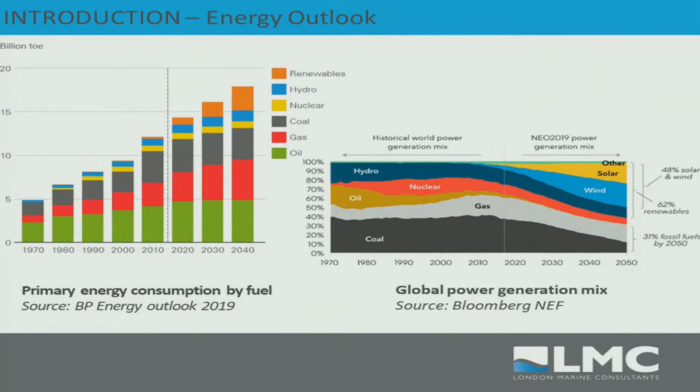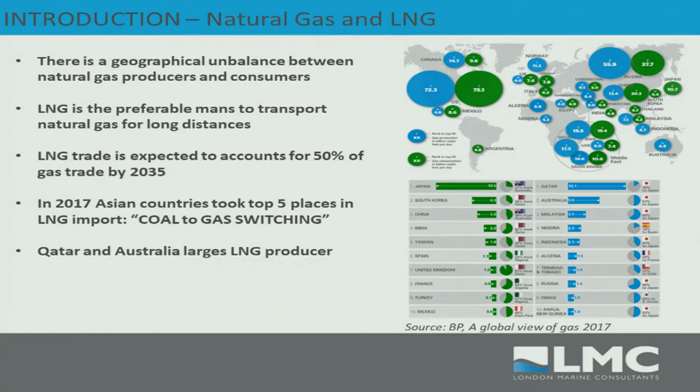Pipeline options for places from Australia to South America or to the Far East are not feasible. As an introduction to the energy supply chain, again this has been discussed already, but first of all we need to understand where an FSRU enters the gas supply chain on the marine sector. This is a simple schematic that shows the three main components that compose the supply chain.

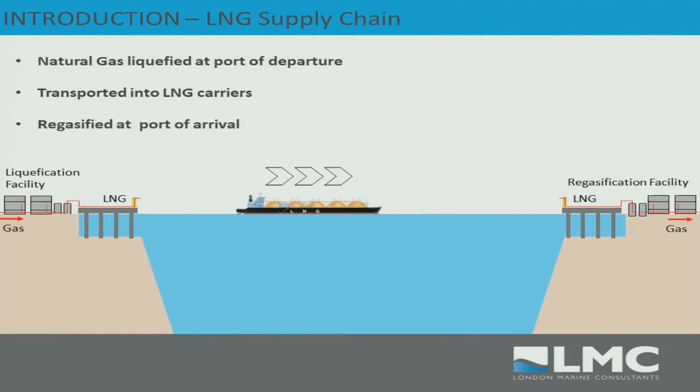We have a liquefaction facility at the port of departure, in which natural gas is transformed to a liquid state, transported in a cryogenic state via LNG carriers, and then delivered to a port of arrival where a regasification facility unloads the energy and converts it to a gaseous state and sends it to the market and to the consumers. As we probably all know, FSRUs enter the supply chain as the port of arrival and regasification facility.

LNG carriers berth on the side of the FSRU, typically unload LNG stored in the vessel tank, and it is regasified and delivered. There are several advantages to FSRUs compared to, let's say, shore-based terminals, and these were already presented by the previous speaker. They can represent a reduced upfront cost, for example, due also to the fact the contracting strategy is quite different.

FSRUs tend to operate on a lease-and-operate basis, so the terminal doesn't own the vessel, but leases it for a fixed term of years, reducing the upfront cost. Schedule, again, for a project startup is short - we're talking about 1 year against 4 years - and the overall footprint is smaller.

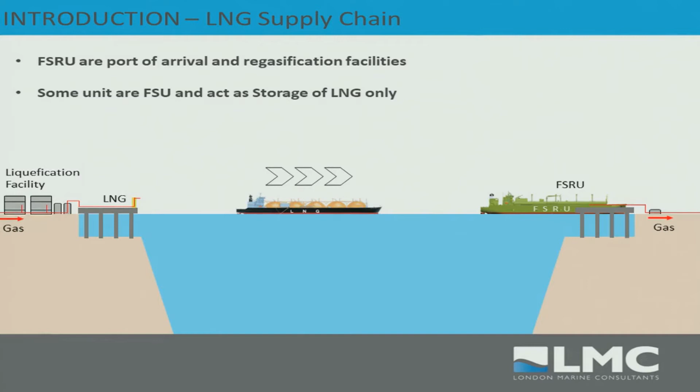All the storage and regasification facilities are on board the vessel, minimizing the amount of infrastructure needed onshore. So an FSRU can be a long-term solution for regasification, or a short-term one to cover, for example, a peak in demand, or to provide a solution while bigger onshore structures are built.

A little bit of introduction on what an FSRU actually is: based on LNG carrier design, with the addition of regasification and metering modules, for example. Owners love the flexibility to use an FSRU as an LNG trading carrier in between contracts to make the economics of the vessel work, and using a fully seaworthy design is the best option.

In certain specific cases, when the actual volume of storage required is small, the utilization of an LNG carrier design is not economically beneficial, because there is no need to use it as a trading tanker. And then we see that some FSRUs in the small case are based on non-self-propelled barge designs.

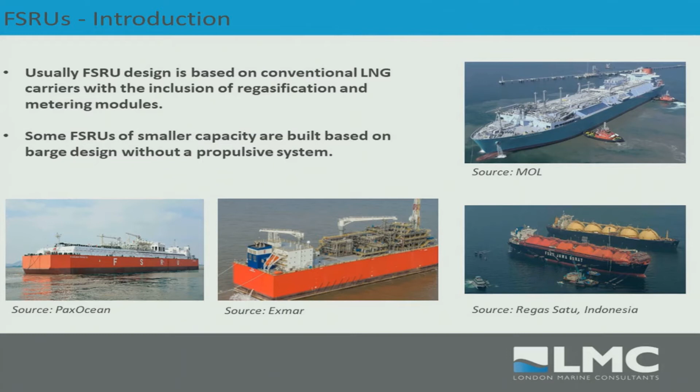The majority of the vessels are seaworthy LNG carrier design. We assessed that more or less they are all similar. So what's the main difference for an FSRU project is the position where the vessel is actually located, or moored.

In order to be economically viable, the vessel needs to be as close as possible to the entry point in the gas network, or as close as possible to the end consumers. That's why we see that the majority of the FSRUs are actually more on the jetty side, inside a sheltered harbor, or on sea islands near to the shore.

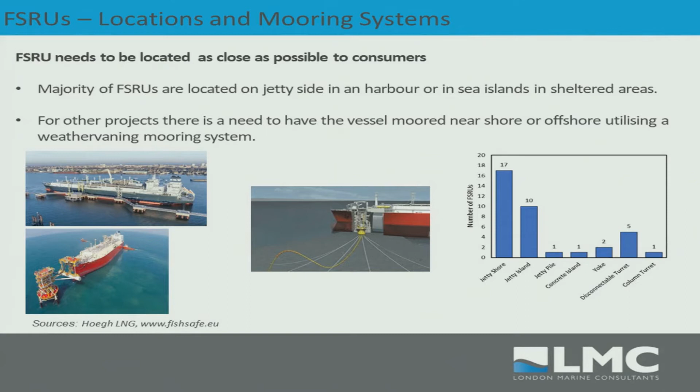But there are still some cases in which it's not possible to moor an FSRU in a port, for example, in developing countries, or in places in remote locations where infrastructure is not available. Therefore, other mooring options need to be considered that can basically lead an FSRU project to be technically viable. We see vessels moored on sea islands, few meters from the shore, or few miles from the shore, and we see FSRUs that are more 20 or something miles offshore, in what we call a harsh offshore environment.

And what kind of mooring options are available to an FSRU designer in order to locate an FSRU where it is needed? As we said before, the majority of the vessels are jetty moored with a mooring system that is typical of the marine industry, something that you are probably more familiar with.

Then we're moving further away from the shore. We have sea islands, similar concept. Then when we move further offshore, we start seeing mooring systems that are more typical of oil and gas applications. We have complex turret mooring, and we also start to see the utilization of spread mooring systems.

So by looking at this picture, from a mooring design point of view, I see the two ends of the spectrum. From one side, we have a very simple marine jetty side mooring, and on the other end, we have complex turret weathervaning mooring systems.

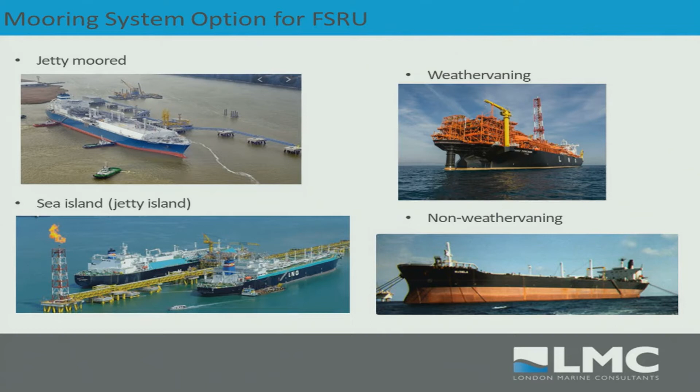And all of them have been applied successfully to FSRUs. So the designer needs to know what are the actual options available, needs to know the limitations of each, and this is what I'm trying to do in this presentation. I'm trying to introduce the different systems in general terms, describe the main characteristics, and provide some advantages and disadvantages that are usually considered at a concept selection phase, when it's quite important to rule out unfeasible options and include all the technically and commercially available options.

So starting from jetty mooring, this is probably the easiest and the most common form of mooring system. If you visit a port, we see tens, hundreds of ships moored to a quayside. The mooring system runs from the mooring winches or fairleads to mooring bitts and bollards and quick release hooks on the pier. And the design of a mooring system for an FSRU in terms of layout is not much different from that of any ship.

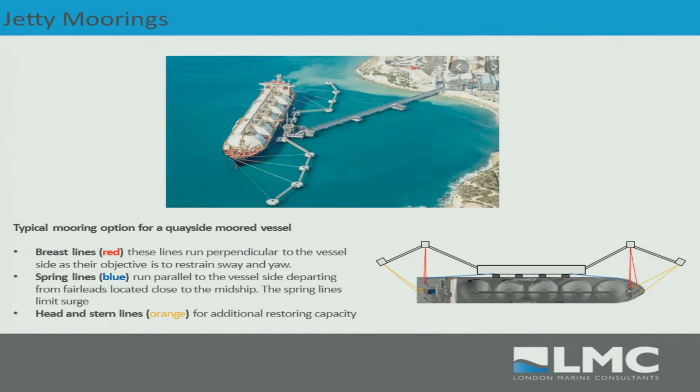Ship mooring lines are grouped with regard to the function they need to satisfy, depending on if they have to resist longitudinal loads or transverse loads, and depending on what position or part of the vessel they are located. I won't go much into detail, but the important thing is that the analogy, in a certain sense, stops here. So although the two systems look exactly the same and the layout can be designed with the same kind of guidance, the way the systems are actually designed is quite different.

For a trading tanker visiting a port, mooring is usually seen as a temporary activity with a short duration, and the mooring system is designed based on a simple quasi-static or static load balance check. For an FSRU, jetty side mooring is seen as a long-term operation, in the same manner as for an FPSO. Therefore, the type of analysis and the load cases that need to be verified are more detailed. We need to start looking into dynamic mooring analysis, combining wave frequency and low frequency motion.

And we introduce a new set of challenges that are not common in the oil and gas industry. For example, the effect of shallow water on wave mechanics and complex bathymetry, ship-to-ship interaction during offloading operations, and even ship-to-shore interaction in some cases, or loads from passing vessels. And all these designs need to satisfy a specific set of class rules that is quite inspired by the offshore oil and gas industry, so it's a quite severe set of rules.

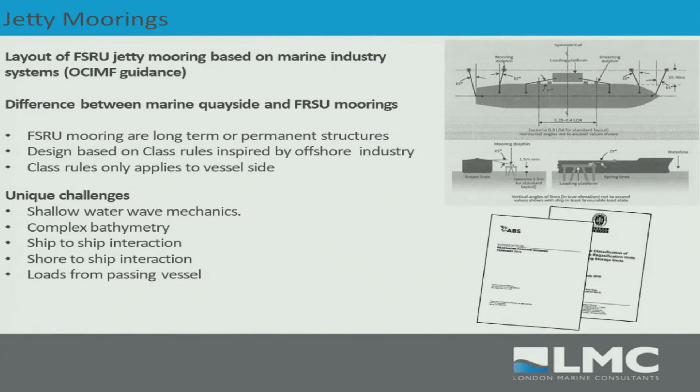And so the takeaway point is, yes, they are indeed something that we are familiar with, but the type of specification, the type of capacity of the system, and the type of design life, as well as fatigue considerations, play a role and are quite different from what we are commonly used to.

Just to give a little bit of idea on advantages and disadvantages of jetty side mooring: jetty side is an established and well-known technology, and there is a long list of contractors that can actually provide the work, and more importantly, there is a big pool of local contractors as well.

So in some countries, when there is a need for local content requirement, a structure of this type is usually a good thing. They provide easy access to the vessel, and the marine facilities are less exposed to the environment, providing benefit for maintenance and operation and wear.

The main disadvantages are that building a jetty, if it's not available, is a substantial work that can take years.

If the vessel is very close to the shore, it's possible that there is need for dredging activity, either at startup or also maintenance dredging during operation.

And these, for example, we have seen in some cases where dredging was a stopper for the project, for selection of specific location, as it can create a shipping hazard because it can obstruct the traffic routes.

And they are also close to local shore communities, and they can provide an issue for the approval process of the project. And in some countries there is also a security risk, a security concern, with the structure being accessible from the shore.

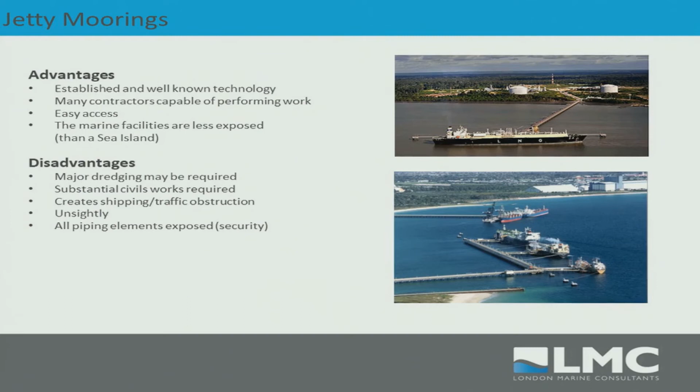So moving one step further offshore, we have another type of system we call sea islands. The concept of mooring is exactly the same.

The vessel is moored on the side of the pier, but in this case there is no physical connection to the shore anymore. It's a quite broad definition because it includes systems that are few meters from land, as well as systems that can actually be a few miles offshore in the middle of bays.

But the way we decided to split between jetty connected to shore and not connected to shore is that for this type of project there is generally the need to lay a pipeline on the seabed, which changes the contracting strategy and also changes sometimes the balance of overall cost for the project.

Technical considerations of the design of this system are quite similar to the previously seen shore-connected jetty mooring, but now the vessel is more exposed to the open environment.

There is probably the need to plan for disconnection, or a procedure for emergency disconnection. And the terminal availability is also reduced, especially for offloading operation.

This still tends to occur side by side. But in some cases, when, for example, we are talking about what we call a cross-jetty layout, the LNG carrier is actually moored on the other side of the jetty, with LNG transfer through the sea island. And they can be used to enhance, for example, availability.

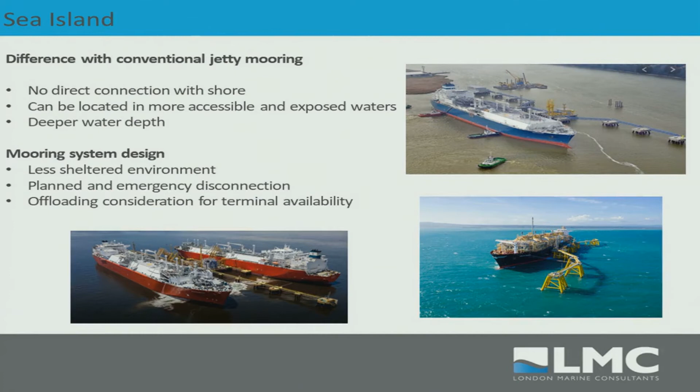What are the advantages and disadvantages compared to the previously described mooring system? By moving the terminal further away from the shore, we can access deeper water, removing the requirement for dredging. Again, it's an established technology, the same type of structure as a shore-connected jetty.

They provide additional safety and security, since access to the pipe is not feasible, and the structure is not accessible from the shore.

Moving away produces less visual impact compared to a shore-connected jetty, and moving aside from port gives a lesser impact on marine traffic. The main disadvantages are the ones we basically discussed a few minutes ago.

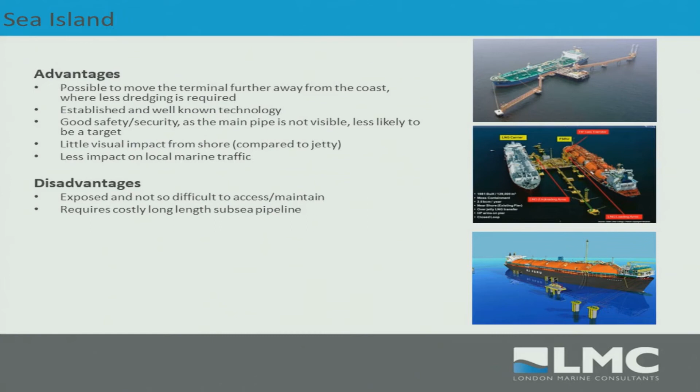The exposure to the environment does not produce the same amount of availability and reduces the number of locations in which this system can be used. And in some cases, the cost of laying a pipeline is a big part of the overall cost of the project.

So moving further out, we enter the domain of oil and gas mooring solutions. If we need to locate our FSRU in more exposed open water, we need to design our mooring system in the same manner as it is designed for an FPSO unit. The system of choice for FSRUs is typically a weather-vaning mooring system.

For those not familiar with it, in a weather-vaning mooring system, the vessel is allowed to rotate around a single point called the turret, which is, for example, this structure here, in which all the mooring lines and mooring risers terminate. By doing so, the vessel aligns itself with the prevailing environment, reducing environmental loads and vessel motions, and permits units to operate in harsher environments. For example, in the North Sea - which isn't actually the case here, but we'll use it as an example.

For an FSRU project, we have seen three types of weather-vaning mooring systems applied: permanent turret system, disconnectable turret system, and yoke system. I'll try to go quickly through all of them, describing the main characteristics and pros and cons.

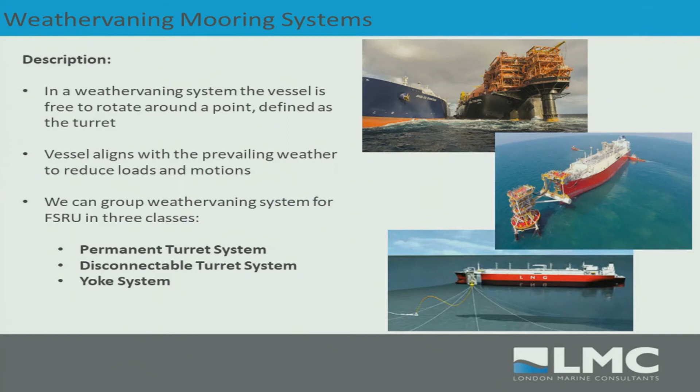We start with a permanent turret. In a permanent turret, the vessel is permanently moored, so there is no disconnection capability. Permanent turrets can be defined with respect to the location of the turret along the vessel. The most common type is the external cantilever, where the turret is located at the bow of the vessel, above the free surface. Other types can be a column turret, where the turret is at the keel level, always at the bow, outside the hull, or an internal turret, where the turret is located in a moon pool inside the vessel hull.

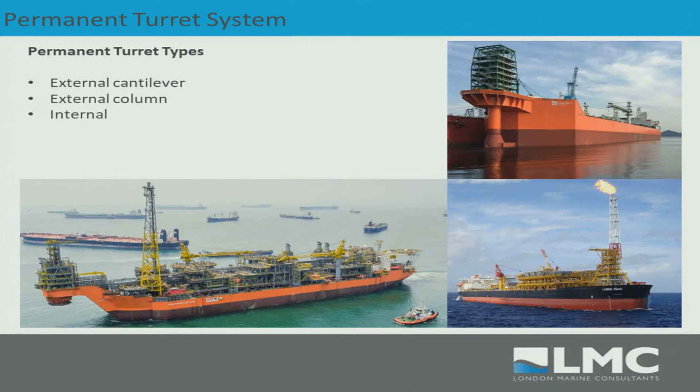Regardless of the type of turret, they all share the same components. Starting from the bottom, let me introduce this picture. This is a snapshot of a 3D model of the turret for the Toscana FSRU, which is permanently moored offshore Livorno in about 120 meters of water.

Let's start from the bottom. We have what we call the chain table, where the mooring lines terminate and risers enter the hull through bend stiffeners. Going all the way up, we reach the main deck height of the vessel, where we have a platform that we call the turret head.

At the turret head, we usually have the bearing, the slewing bearing. This is the mechanical piece of equipment that allows the structure of the turret to remain stationary while the vessel rotates around it. There are different configurations of bearings - they can all be located on the main deck, or, like in this turret, there can also be a smaller sliding bearing at the keel level. Some use bogie wheels, so there are a lot of options.

Above the turret head, we have all the geostationary pipework, so all the piping connected to the chain table terminates into a swivel. The swivel is a mechanical equipment that allows fluid transfer between a fixed pipe and a rotating one. So while the bearing provides a mechanical coupling, the swivel provides the fluid coupling between the vessel and the seabed. In this case, on the FSRU, gas is pumped through the swivel, reaches inside the piping of the turret, enters the column, and is then sent out through the flexible risers.

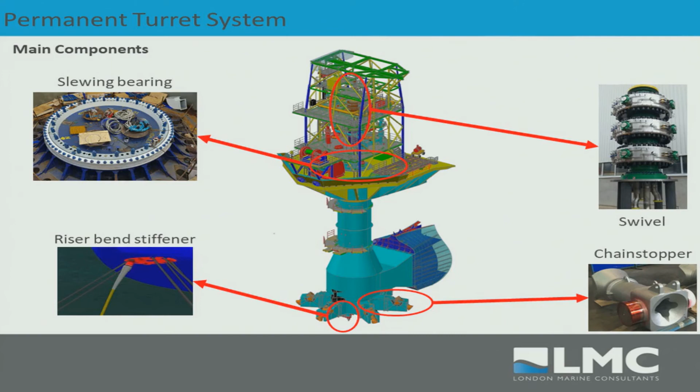What are the design considerations for turret mooring for FSRUs? We have seen in the previous slide different types of turret, but we can say that column turrets are best suited for use in an FSRU project.

This is due to the shape of the FSRU. FSRUs are indeed based on LNG carrier designs, and there isn't much steel at the main deck level to allow for load transfer. Therefore, a structure like a column turret, which integrates both a main deck and keel level connection, allows for easier integration with less modification work on the vessel compared to other systems. But although it requires less modification work, installing a turret on a vessel is still a major modification that in some cases prevents the vessel from being used as an LNG carrier anymore, because once the vessel is permanently moored, it's classed as an offshore installation, and the mooring system is...

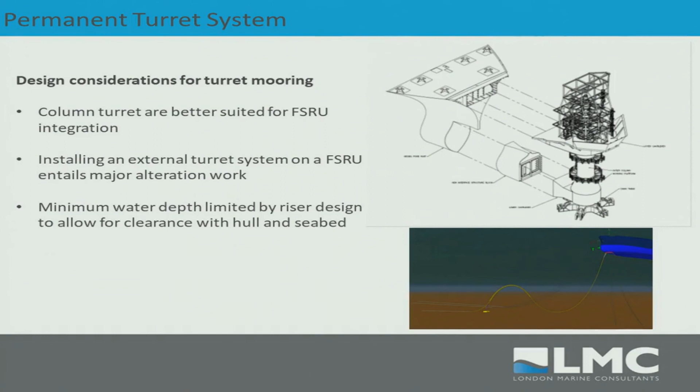So if you want to quickly go through the advantages, it's a well-known technology and it allows the FSRU to operate in harsher, more open environments.

In case the vessel is equipped with thruster, they also allow for weather vaning to ease offloading operation by sheltering the incoming LNG tanker. The main disadvantages are cost-related.

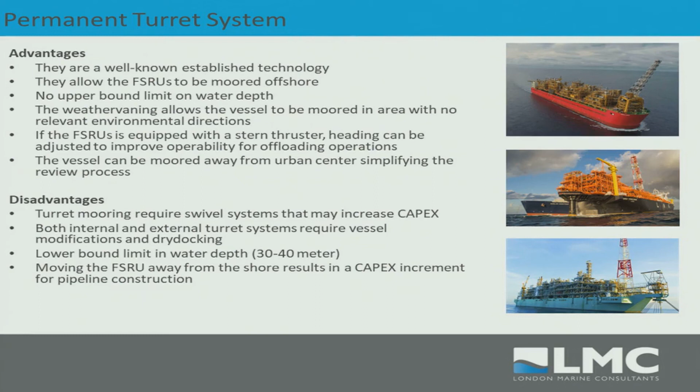Turrets require quite elevated capex for some mechanical infrastructure. You require drydock for installation, and something we didn't discuss for time, there is also a lower bound application limit due to the clearance between the riser and the vessel keel when the ship weather vanes on top of the riser.

Another type of turret is a disconnectable turret buoy, like the one that the previous presenter discussed. In this case, mooring line and riser terminate into a mooring buoy that is pulled into a moon pool inside the FSRU hull. There are different types of mooring buoys, but the type on the left is the only one utilized in FSRUs.

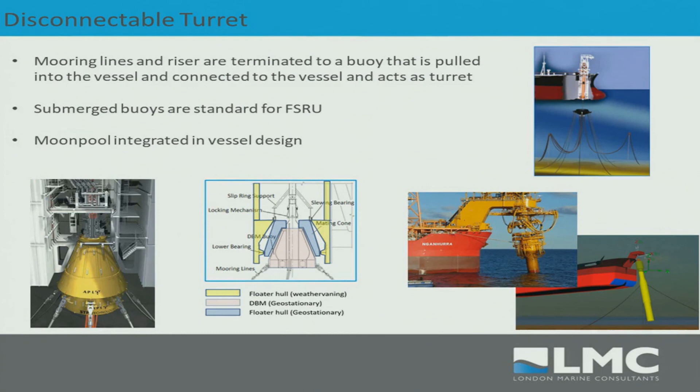The main advantages are that in this case, it's possible to moor the vessel in quite harsh environment with small infrastructure, because in case of storm, the vessel can disconnect and sail away. It can be applied to shallow water depth because the weather requirements are smaller, and one vessel can connect to several buoys, simplifying the switching from one project to the other.

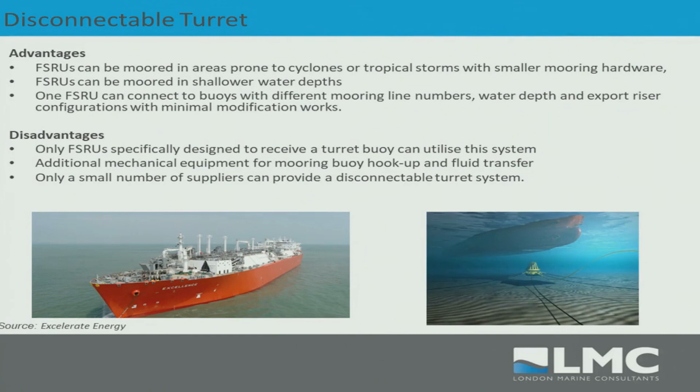Disadvantages: there are only a limited number of suppliers that can provide the system, and there are a limited number of FSRUs that can actually receive it.

The last type of weather vane mooring system is a yoke. There are currently 2 FSRUs mooring using a yoke. In the case of a yoke, the tower is connected to the seabed either via jacket or a seabed template, and the vessel is connected to the tower using a counterweight structure called the yoke.

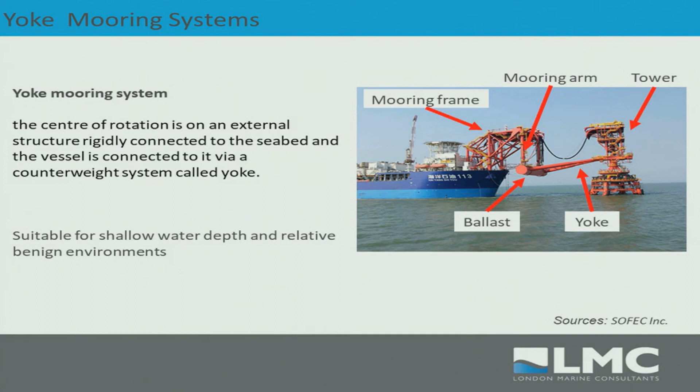The fact that the restoring force is provided by a well-defined component allows the system to be installed in shallow water depth, something like 20 meters. It is not available on common moored vessels, and it can be utilized in quite benign environment. I think the limit is around 5.5 to 6 meters HS.

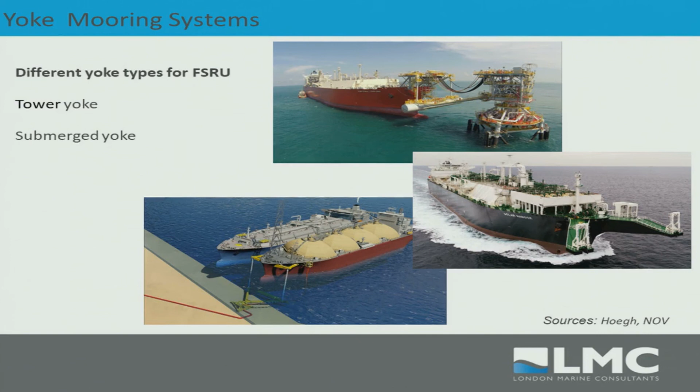There are different systems depending if the turret is above the seabed, above the free surface, or on the seabed. In the case we have tower yoke or we have submerged yoke. Main advantages, as I said before, you can access shallower water, reduce pipeline lengths. Modifications of the vessel are reduced to the main deck level.

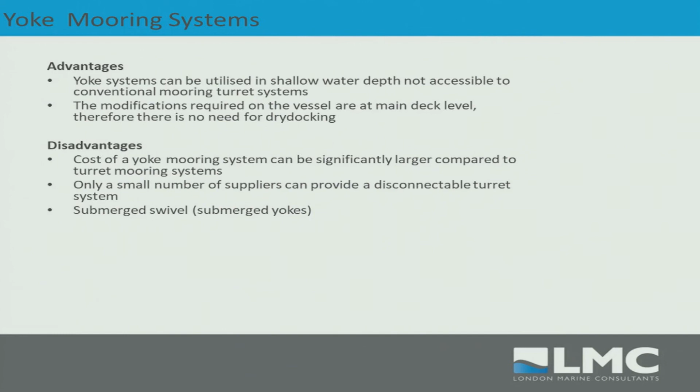Main disadvantages: the yoke is an expensive piece of equipment, only a limited number of suppliers can provide it, and a submerged swivel for submerged yoke is a type of equipment that is not accepted by all operators.

The last type of system that I'm going to discuss is something that has not been seen today in the FSRU industry, but it starts to take its place, and we are talking about spread mooring system. Spread mooring system is the simplest means of mooring for an offshore vessel.

The vessel is fixed headed. It can be used when the environment has a prevalent direction. Vessel is headed toward the prevalent environmental direction, and moored to the seabed using a mooring chain connected to the deck, the side, or the keel of the vessel.

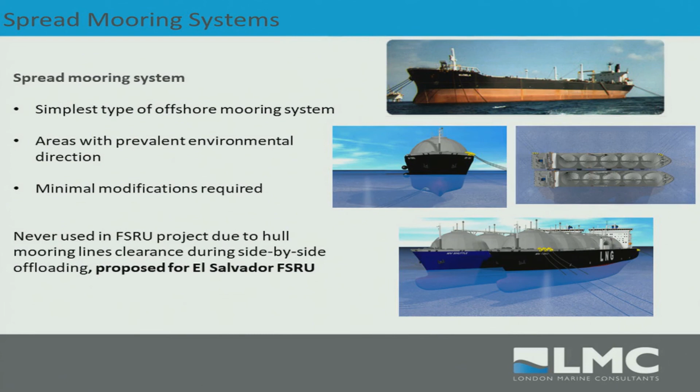There is no application for FSRU because there has always been concern about interference between mooring lines and the approaching LNG carrier for offloading. But we have seen now that for the El Salvador FSRU, a particular type of spread mooring system has been considered.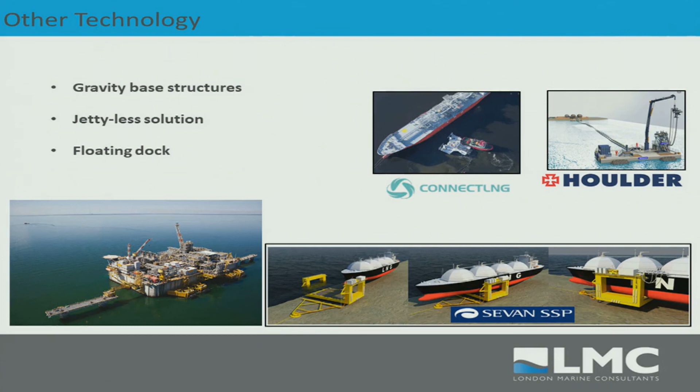There are other sets of technology that we are not going to discuss because they are not properly defined and don't enter into either the category of FSRU or the category of mooring, but there are other options available, such as gravity base structures, jetty-less transfer solutions, in which the liquefaction is still onshore based, but the transfer occurs without the need for a jetty, or there are solutions that try to introduce a floating dock with regasification facility for the berthing of an incoming LNG carrier.

All the discussion that I tried to quickly rush through this afternoon is summarized in the paper in a sort of flowchart map, in which we try to identify the possible solutions, even given different specific project constraints.

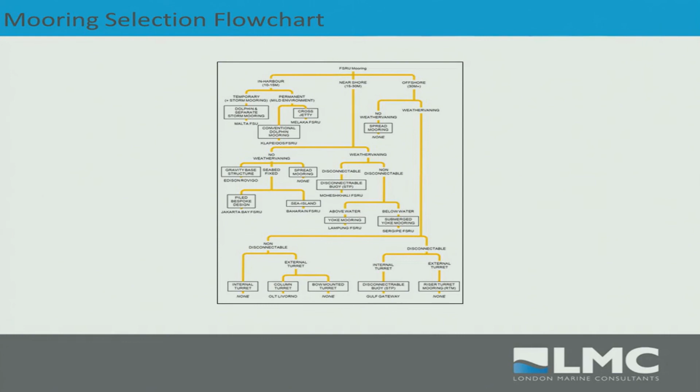Just to conclude, the majority of FSRUs are indeed quayside moored vessels in nice harbors, but knowledge of all options available allows projects that otherwise are considered unfeasible, both technically or economically, to be actually viable and to go ahead. Thank you.